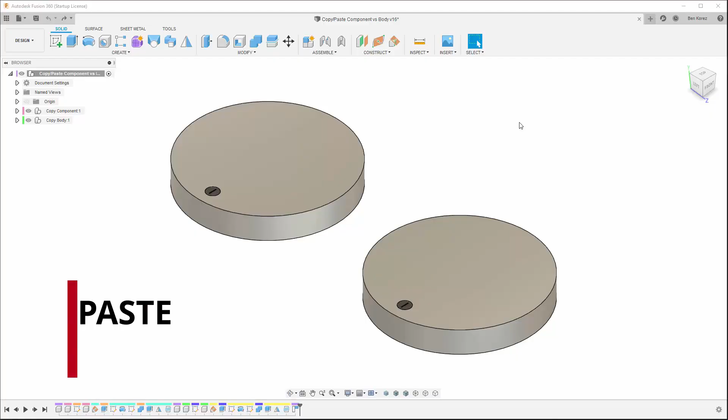In this video we will take a look at copying components and bodies. I wanted to make this tutorial because deciding whether to copy a component or a body can be quite confusing, especially for people who are just starting with Fusion 360. I will do my best to give you all the information you need, and hopefully by the end of this video you will know if you should copy a component or a body, the difference between copy types such as paste and paste new, what other tools we can use to create a copy and what type of copy they are creating. We'll also check out limitations, how to recognize a copy type, and I'll give you some pro tips along the way.

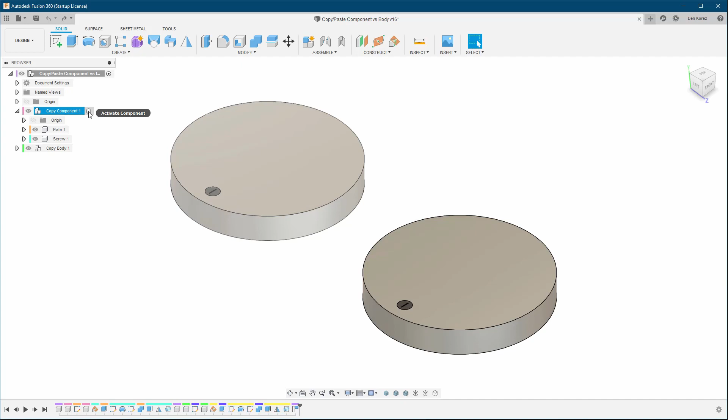So you also have to be aware which component is active at that time, which is also why in Fusion we have rule number 1: always activate the component you're working on, which also includes the sub-assemblies. So if I want to paste it under the copy component sub-assembly, I need to make sure that one is active. Second thing is you can also right click, for example, on the root component, if that's where you want to paste it, and then paste it there.

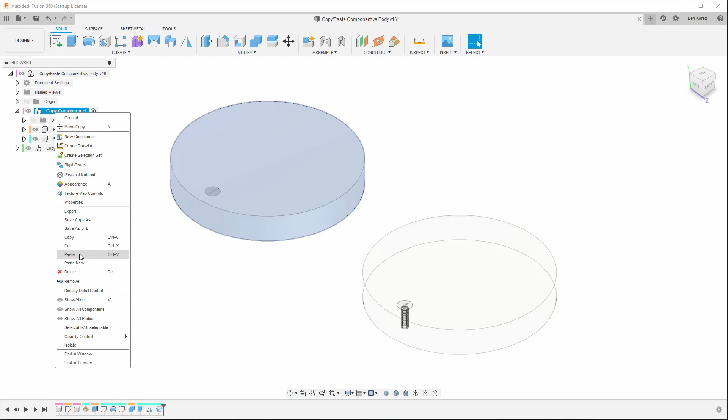Now I know where it's going, under the subassembly copy component. So I'm going to right click, and here you can see two options: paste and paste new. We're going to see which option gives me what. So we start with paste. Here we can see we pasted, we got a new component, and we also have the move tool, so I can move it wherever I want. I'm just going to place it right here for a moment and hit OK.

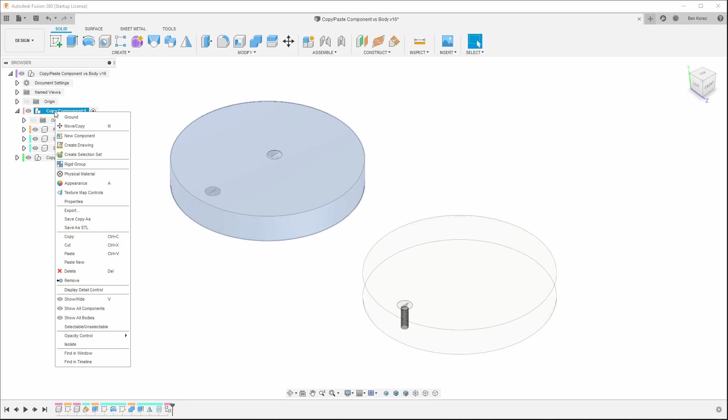Now let's try another paste, but this time using paste new. Again we get the move command, and now I can paste it right here in the middle. I'm going to capture the position and click OK. I'm just going to zoom in so you can see it better, and hide the plate. So this one is paste, and this one is paste new.

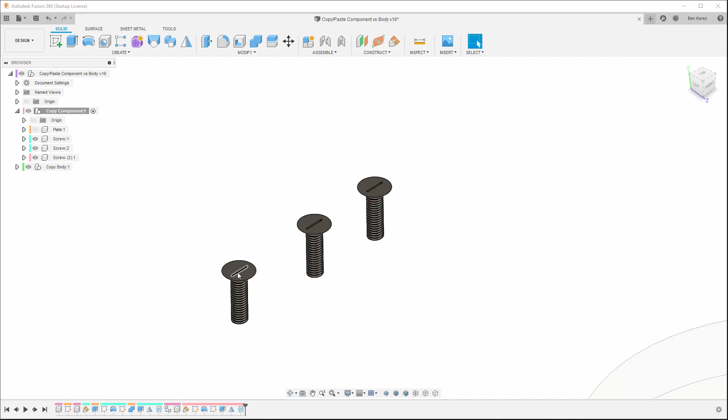Now many times there are situations where you want to keep identical copies and make sure that if you make a change, it applies to all the copies. So let's figure out what happens if I make a change to the original component. I'm going to turn this one, instead of a flat-headed screw, into something else. So I'm just going to select this face here and hit delete. As you can see, the first one we pasted also got affected, but the one in the middle, which is paste new, wasn't affected. This means that when we do a paste new, we are creating an identical instance, but it's not connected, or as I like to call it, linked.

So paste new is unlinked, and paste is linked. Now there is a way to also recognize a copy type.

If, for example, you have many copied components and you want to know which ones are linked to which components, and if some of them are not linked, but it only works with components.

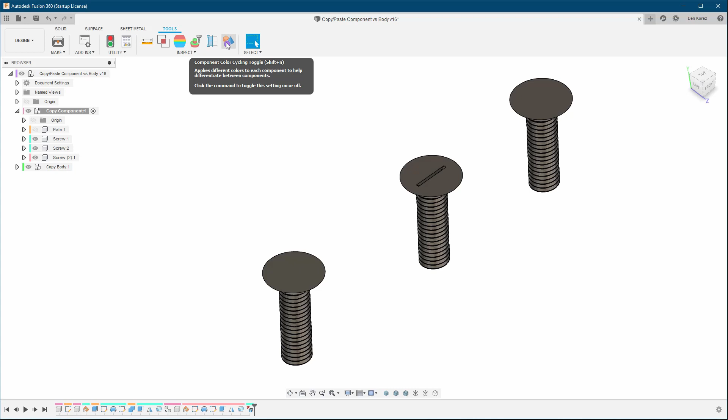So you can go to Tools and then Component Color Cycling Toggle. When I click on this, as you can see, these two, the original and the second one that I pasted, have the same color. This is how you recognize that these two are actually linked to each other, and this one in the middle is not, because it's got its own color, which tells us it's unlinked.

So this is also another way of recognizing it. In this example it's quite bad because there are only a few, so it's very easy to distinguish. But in case we have many copies, this is where it can be very handy.

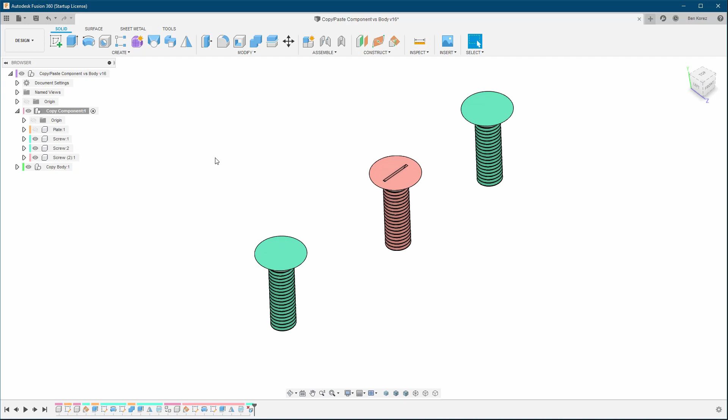So now we know the difference between paste and paste new. Now, what are the other tools which create copies, and what type of copies do they create? So we'll start with...

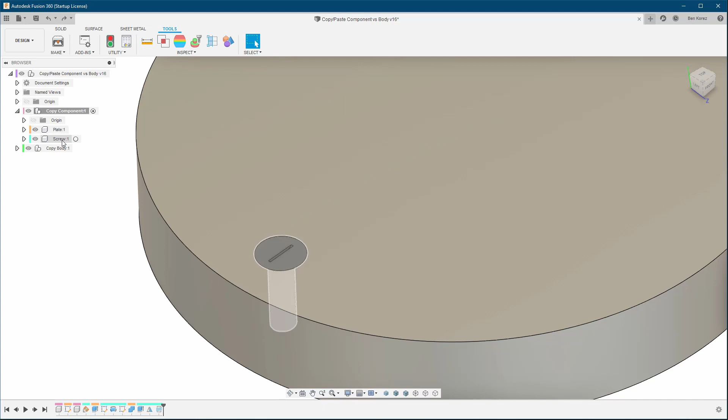Let me just bring this one back to normal, so we have only one screw. Now what I'm going to do is, we know we can right click and choose paste or paste new.

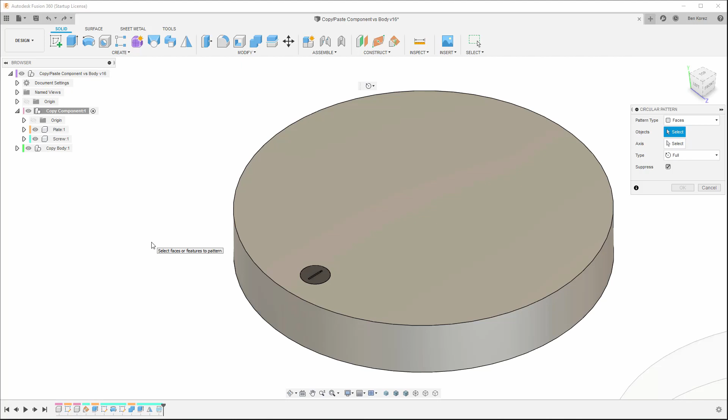Next, we're going to create a pattern. A pattern is also a copy of a component, but it's placed in a specific pattern. In this case, we're going to copy this component and put it on a pattern around this circle. I'm going to add another one, so we have 4 copies, and click OK.

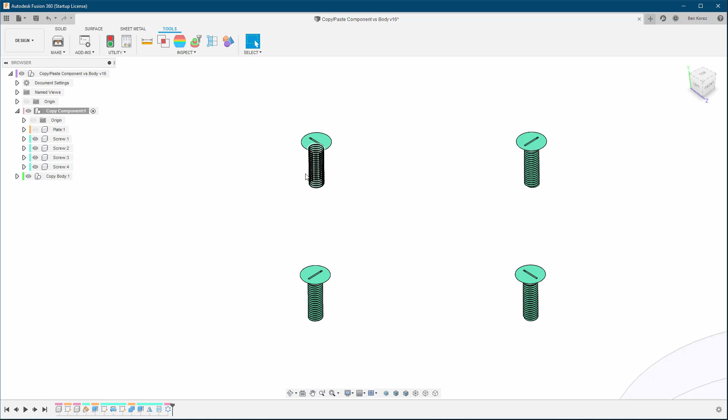So now the question is, what kind of copy version have I created? Is it linked or unlinked? As before, you can go to Tools and check the Components Color Cycling. This is one way of identifying it. As you can see, they all got the same color, which means they're all linked.

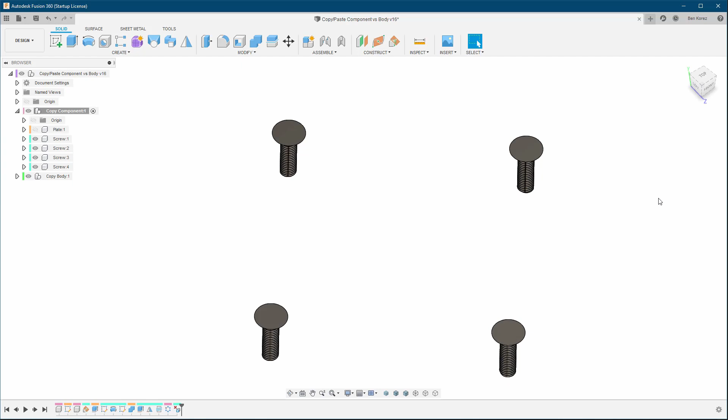But I can also identify it by going to one of them, it doesn't matter which one, because we know they're linked. Select the face, for example, on this one here, and if I delete it, as you can see, it's been deleted everywhere because it's essentially the same one. It's identical.

Now, what about another option to create a copied component? We can use the Move command. So if I bring up the Move command, from here I'm going to choose Component.

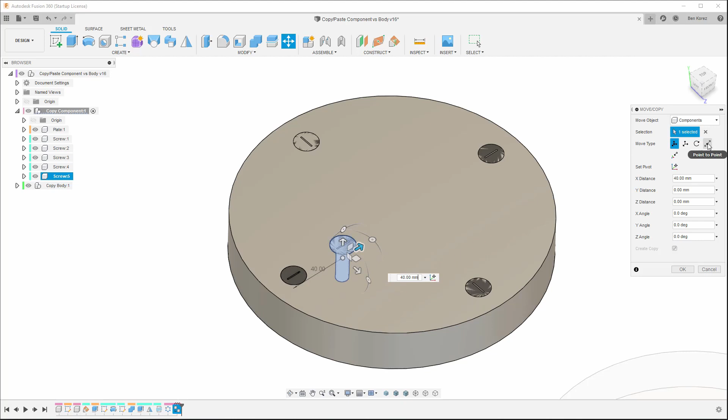I'm going to go to my first one, and then you can see right here below in the dialog box we have Create Copy. I'm going to choose this one and move it somewhere in the center, or maybe use point to point.

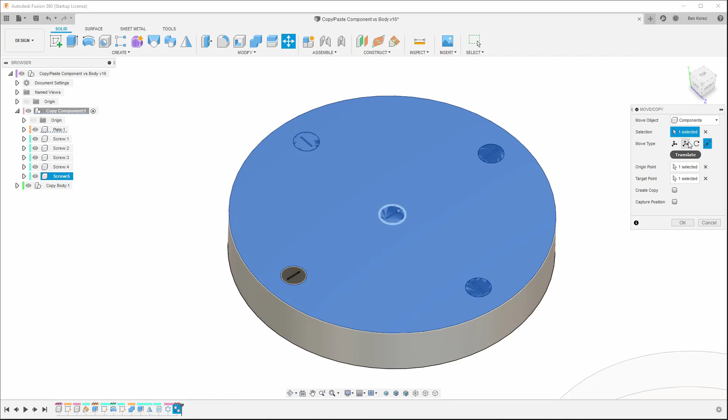So I'm going to go right here, choose this point, and I want it right here in the center. So we're saying, okay, I want to create a copy - I don't want another copy, because each move you click here creates a new copy. So we do that and hit OK.

So now we have our fifth copy. Let's check again what type of copy we just created - we know it's the one in the center. Again, I'll go to Tools and Component Color. And what do you know, the Move command also creates a linked copy.

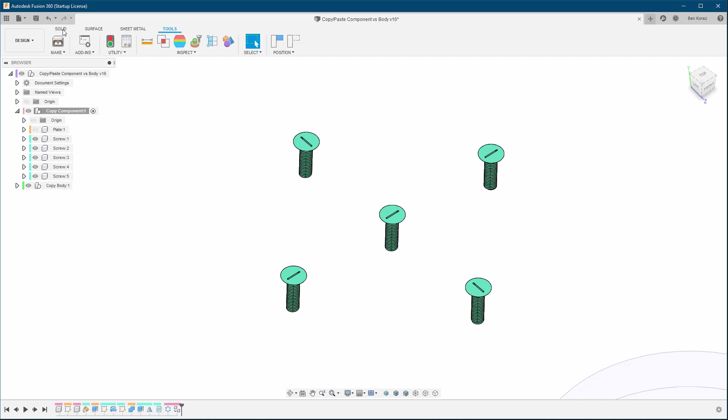Good, so now we have covered paste new, and we also covered the other tools we can use to create copies. And now we know that when you're working with components, they are all producing linked copies.

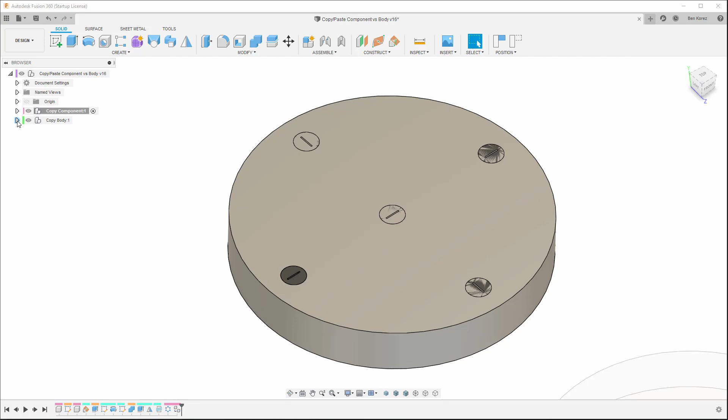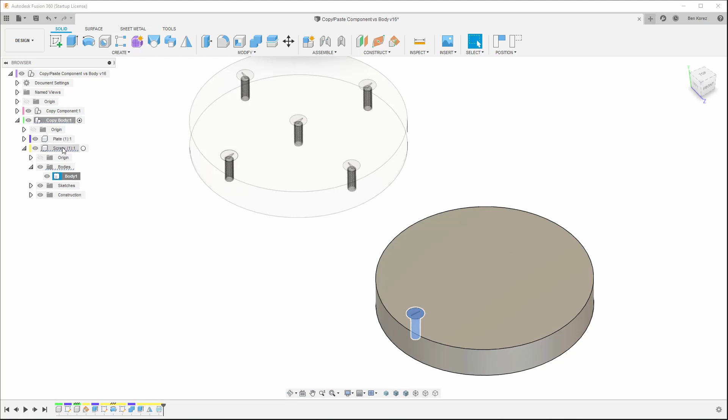Now we can move on and check out body copies. Let me just zoom out, and I'm going to activate the copy body subassembly. We're going to start by doing the same thing. I'm going to go under the screw component, right click on the body itself and create copy. Again, we need to make sure we are in the right place before pasting, because if I paste right now it's going to paste under the subassembly, not under the screw component. So I need to make sure our screw component is active.

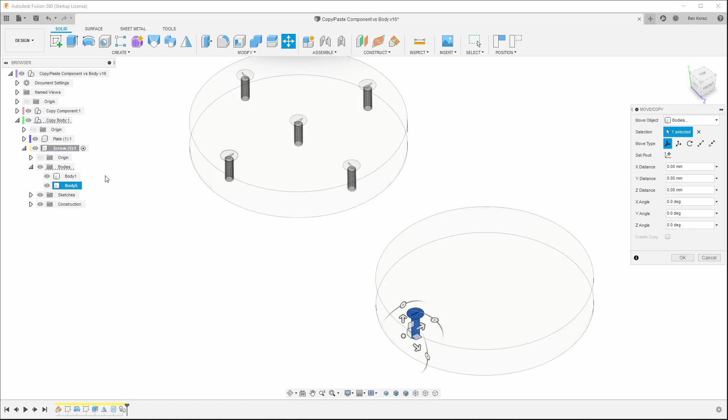So now I can do a Control V, and we just pasted one of them. And like before, that's okay, I'm not going to do anything more, I'm just going to keep it as it is. Click OK. So now we have the original and the copy.

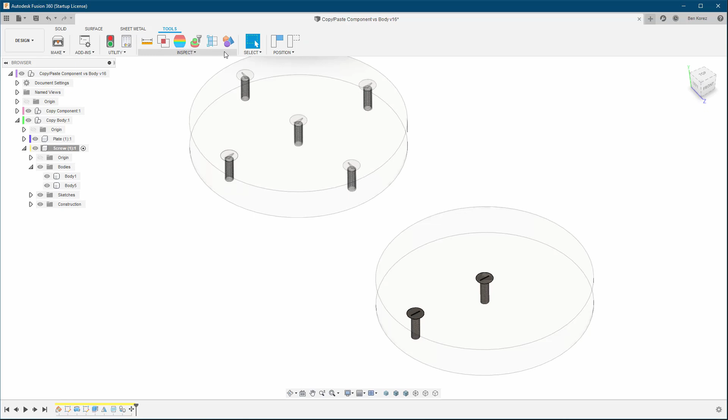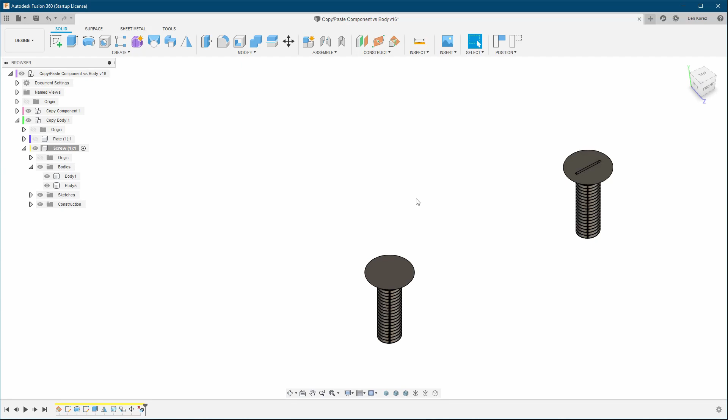Now we need to figure out what kind of copy we have just created. In this case, component color cycling is not going to work because that's for components. But what we can do is test it again as before. Let me just hide this one, go to one of them, select a face and try to make a change. And as you can see, our paste created an unlinked copy, which means I made a change to one and it didn't apply to the other.

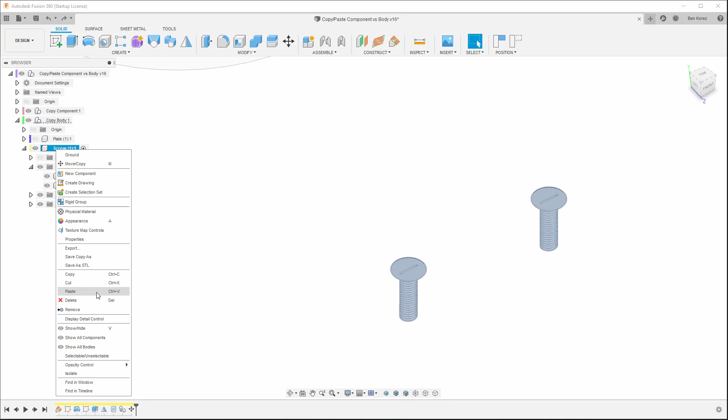Now, what if I do a right click and see what paste options we have? As you can see, we have only one option, only one paste option, whereas under components we had two options, paste and paste new. So that means in a body's case, if you're copying a body, we have one option and this is unlinked.

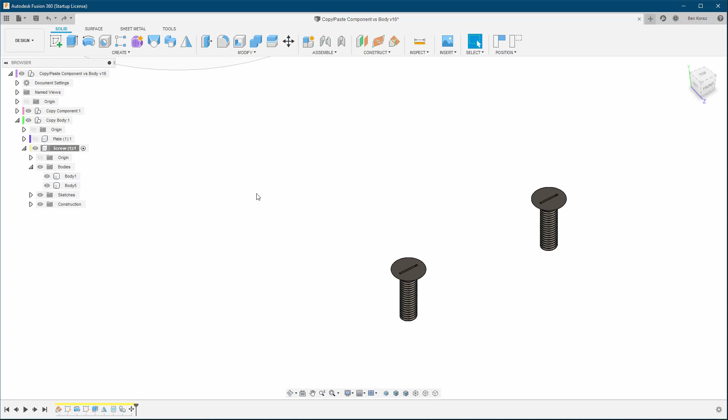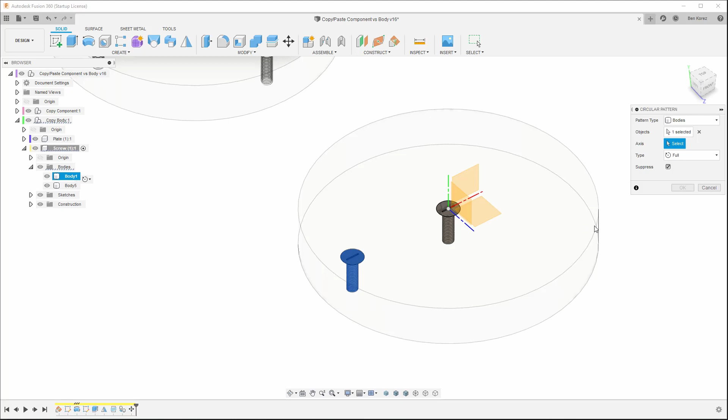So what about if I'm going to use a pattern? If I pattern a body, what kind of copy are we going to get? Is it linked or unlinked? So from here we're going to choose bodies, and I'm going to choose my first one. I'm going to do exactly the same as before, and I'm going to create it 4.

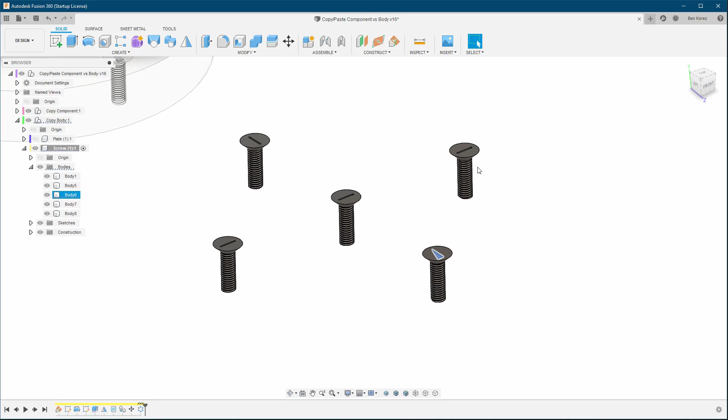Okay, so let's try again. I'm going to take one of them, it doesn't matter which one. I'm going to go with this face right here. Let me just hide the plate and zoom out. And I'm going to hit delete. And again, it affected only this body, but the rest wasn't affected.

So again, also in this case, it's creating only unlinked copies, and that goes the same for the move command. If we use the move command, we're going to get the same results. So that means if you copy a body and you want to create a link between them, it's not going to be possible. But there is a way to go around it.

So let's just say I don't need a component, I just need the body itself. But again, I want to have the ability to make a change to all the copied bodies. So what I'm going to do in this situation, and it can also apply to components when we create a paste new component which is unlinked, so what can we do in this situation? It's very simple.

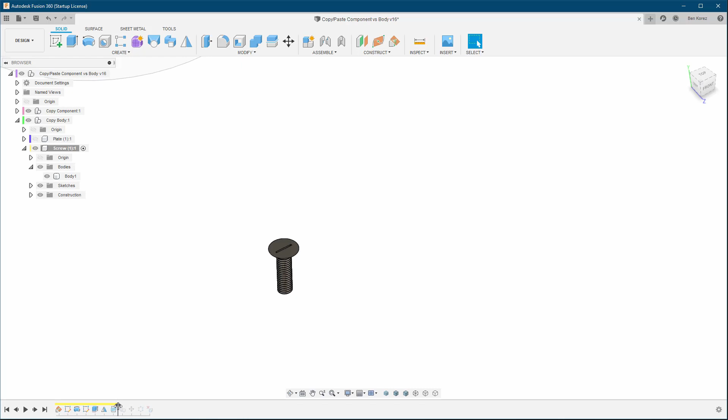We're going to use the timeline. We go to the timeline and move it before the copy. Okay, this is the copy, this is the move, and this is the pattern. So what we're going to do now is make the change that we want. I'm just going to zoom in, hit delete, and then we can move forward again in the future.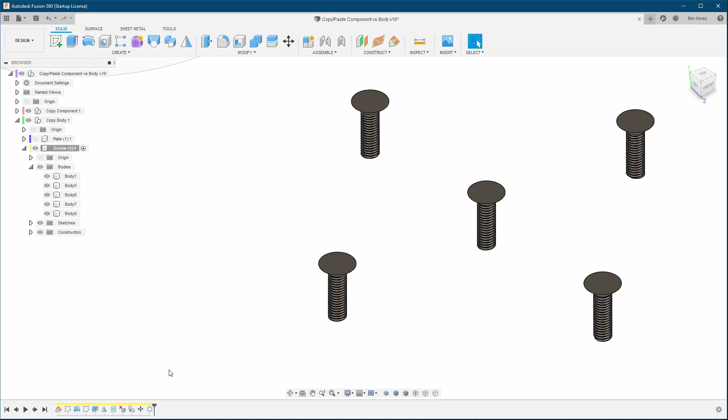Right now, because we're just going to delete this one, it doesn't matter, because we did it twice, that's why we got this error. So as you can see, because we went back, made a change to the original, then moved forward again in the future, now it affects all the rest of the copies. So that's how you deal with unlinked copies. Remember that trick.

And unfortunately quite many people still don't understand how to use the timeline. Sometimes I see people doing these kinds of copies and they don't understand why if they make a change to one, for example a piece of the bodies, it doesn't affect the rest of them. So this is why, especially when working with bodies - if it was a component, you'd know what would have happened.

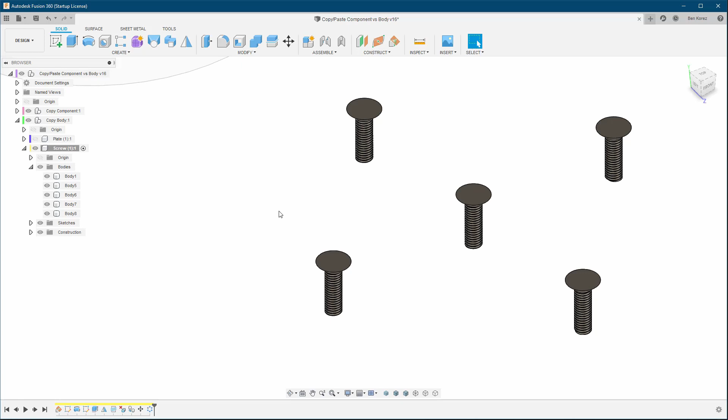Now, so we know the two types. We have paste and paste new in relation to components. We know some limitations between them, and we also know how to recognize the copy types. Now, there is another situation that you need to consider when deciding if you should copy the component or you should copy a body, and that is in relation to drawings, in case you want to create drawings from a sub-assembly or the whole assembly or something like that.

So let's see what happens in a situation where we're using drawings for components that are linked and bodies that are not linked. So we start by right-clicking on the copy component subassembly, and I'm going to choose create drawing. Keep it standard. And I'm going to go right here and choose 1 to 1, and I'm going to change the view to northeast and put it right here and hit OK.

Now, many times you want to create a BOM structure or BOM table, and you want to get all the information nicely on the table, where you can also see the quantity, how many pieces of screws you have. So in this case, as you can see, it calculated automatically and we have 5.

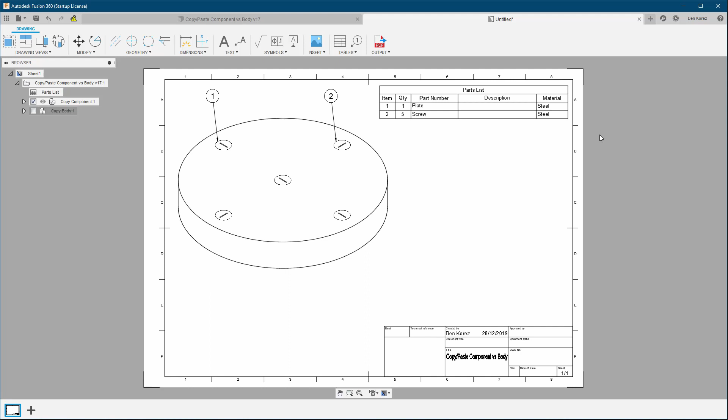Let's try the second one. We go to our bodies that we have copied right here, and we do the same. We create drawing, click OK. We go to scale 1 to 1 and northeast, and we put it right here and click OK. Create a new table. We put it right here.

So as you can see, in the copying body situation, we see only one. That means that the drawings don't calculate bodies, or don't count bodies. Even though we have all of them right here, and we can also see them, it doesn't count them. It cannot see them. So the drawings only count components.

So this is another thing you have to think about before making a decision if you should copy a component. Actually, it doesn't matter if it's new or not, it's still going to count because it's a component. Or whether you should copy and only use the body, because if you are going to copy only the bodies and afterwards you want to create a drawing and count the quantities, then you're not going to get anything, because drawings don't count bodies, only components. So this is something very important that you have to take into account. Okay.

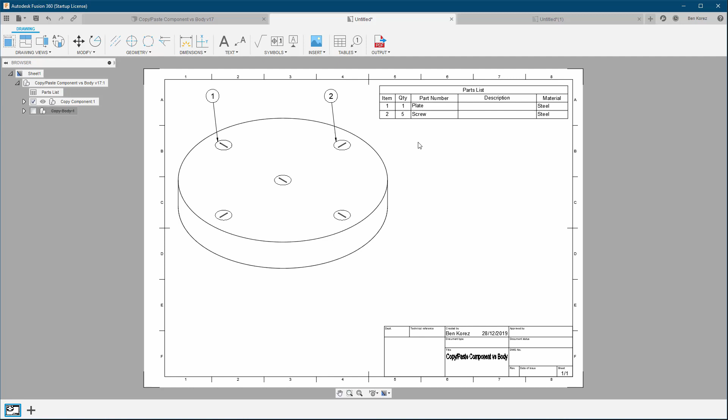Yeah, so this is about the drawings. So this is all the basic information that you need to know regarding copying components, copying bodies, linked copies and unlinked copies. I have created a table that hopefully can help you very easily understand which option you should go for.